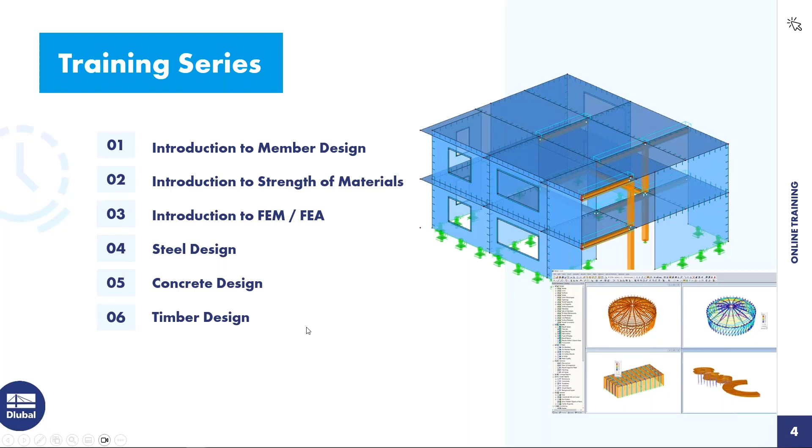Okay, to the whole series of events, you've heard quite a lot until now for the use of RFEM 6. And today is my favorite part of this whole series, the introduction to timber design.

So what are we going to learn today? I have brought 4 different examples. This is just a case of you leaning back and watching, you don't necessarily have to model along. Maybe the first example you could model along, but you don't really have to. All the other 3 examples I use prefabricated templates, so it would be very, very hard for you to follow up if you would like to model along. But that's not a problem, you will get all our examples afterwards in a zip archive.

Good, so that's our today's program. Just to let you know the 4 models we're going to do. We start with an introductory example for a timber column where we're going to perform a stability analysis in timber design. Then I will give you an introduction to design supports and notches in timber design. And then I will model and design a duopitch roof beam for you and a lattice truss. So that's the agenda for today.

It will take about an hour, maybe 5 or 10 minutes longer, but I guess you'll have the time. And then before we start, I have a small question for you. Have you already carried out a timber design using structural analysis software? Just for me to get a bit of a feeling how much experience you have in this topic.

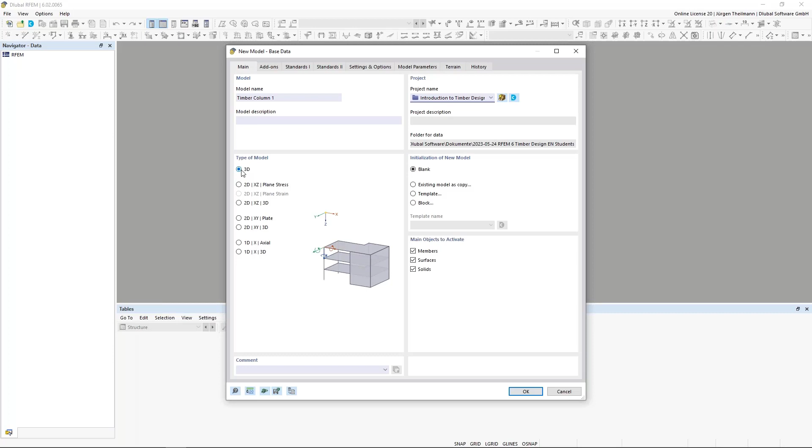I make this a 3D model and jump to the add-ons where I activate the timber design. And after that, it's very important that we go to the standards and check the first one, the standard group for the load case classification. It's not only the EN 1990, it's vital that we choose the 1990/timber here with regards to the SLS. You will see later what this means.

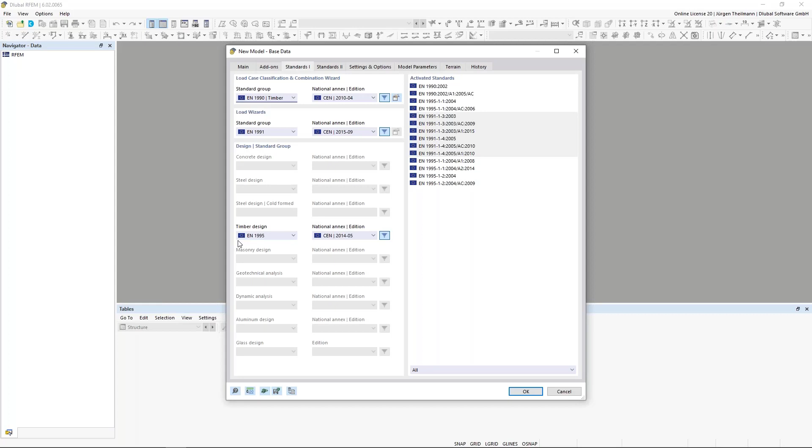We don't use a national annex today because this is an international event, so we're going to use international standards. Also, because the timber design is activated, we can choose the standard for the timber design down here. Okay, that's all I need for this model. I hit OK, and my model will be created in the according project.

Good, I just delete all of these materials and all of these thicknesses. I don't need them for now. So we start with a blank page.

And I just want to design one column. So I say one single member, and I can say perpendicular to the working plane.

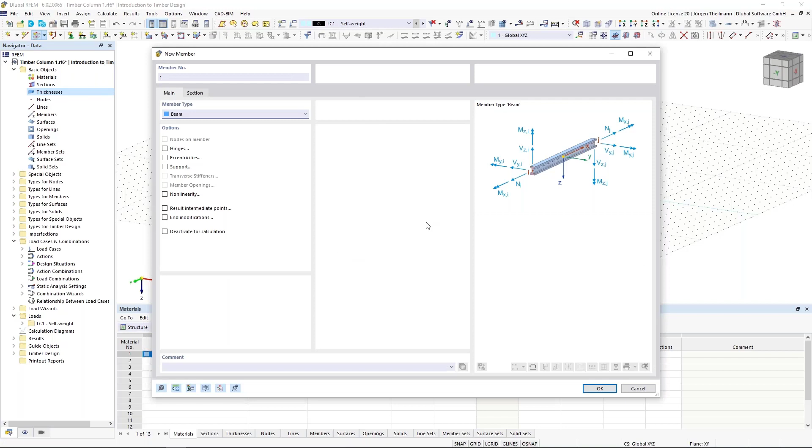So I'm in the dialog for a new member. It will be a beam. I need a section, it will be a uniform distribution type. I'm starting with a new section. I'll make this one parametric massive.

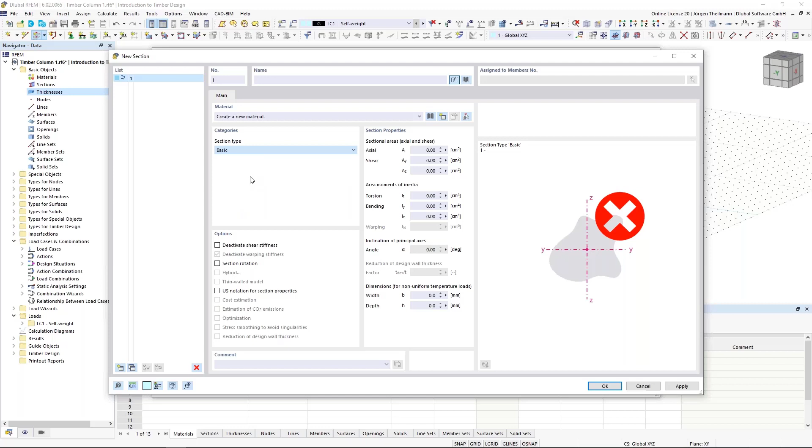Make it a rectangular beam. I added the dimensions, make it 160 millimeters in width and 200 millimeters in height. So these are the dimensions for our cross section.

I jump back to main because I haven't created a new material yet. So I jump to the library for my materials. I'm already in the section European Union and timber.

And now I just utilize our search, looking for C24. Make it this softwood. Good, that's what I wanted.

So now the material is assigned. I can say OK. I have a section with material, say again, OK.

And now you see my mouse cursor has already attached a visualization of this beam I want to create. You can see the dialog on the left. In this, I enter a length of 4 meters.

And you see that at my mouse cursor, if I take this to the origin point of my coordinate system, the column will be pointing downwards. This is something I don't want. I want it pointing upwards.

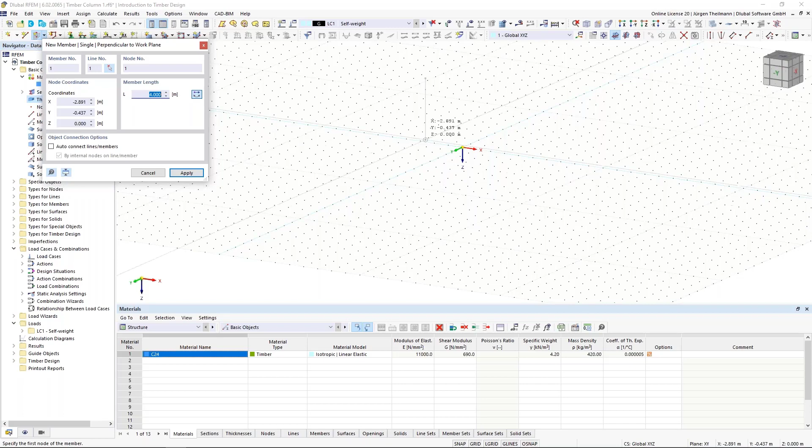So I just use this button in the dialog to reverse the orientation, and I can simply set my column where I want it to be. I dismiss the function with a right click to the mouse. And well, that's basically all for this column.

We of course need now some nodal supports. So I go to nodal supports, use this hinged one to the bottom node, say OK, hit apply to directly create a new one.

Jürgen, we can't hear you anymore, and we also only see a frozen screen. So I hope that Jürgen will be back in a few seconds.

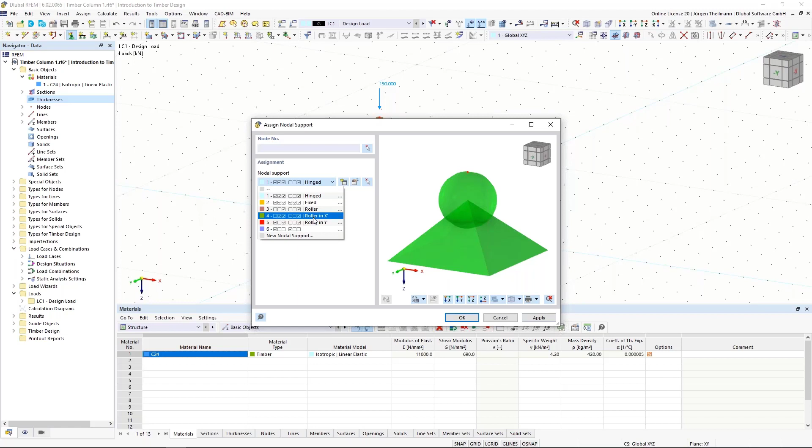It's like this, I guess you all know this. And I hit apply so I can stay within the dialog. There I created a new nodal support just to get a lateral fixation in the x-axis and around the x-axis. I say OK, I can assign this to the top node and say OK again. Whoops, this was wrong.

So now I double click on the nodal support again. These errors can happen very often, but that's not a problem. You just double click on the support itself, and then you can choose from the list. And this is my nodal support number 6, the one I have just shown you.

Okay, I go to the rendering just to check if this is the correct type of my nodal support. Good, now to our load cases.

What I have done here, I have deactivated the self-weight because I want to apply a design load. That's why I called it design load. In the next phase, I deactivated the combination wizard.

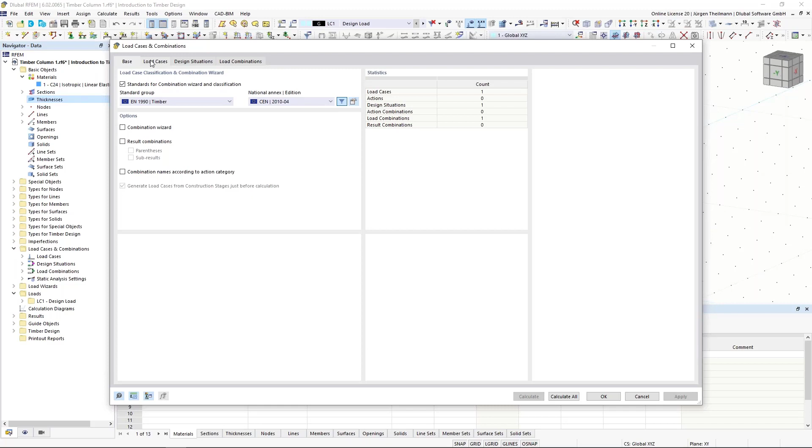This is important - this is the main reason why we choose the standard EN 1990 with timber, because we have to choose our load duration. In our terms, we're going to use a medium term. If we hadn't chosen the correct standard, this whole part wouldn't be available, so we wouldn't have been able to define a load duration. But now we are, since we have chosen the correct standard.

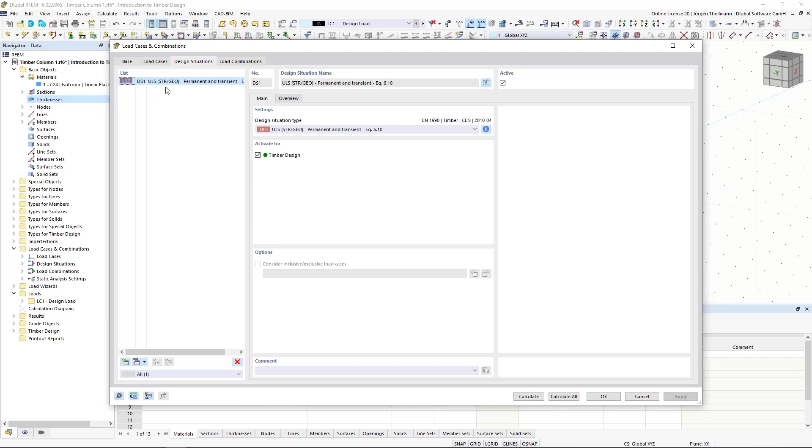Now, design situations - there are by standard some design situations predefined. So we have our ultimate limit state and several serviceability limit states. In this dialog, I just deleted our SLS design situations because I only want to perform a stability analysis, which is of course a ULS design check.

Since I have deactivated the combination wizard, I had to create a new load combination using the button with the star right down here, and I have just assigned our design load times 1. So that's all for the load cases.

And the nodal load is pretty easy. I go to the part where I have all my loads - I have the nodal load. Since I'm now in the load combination, I can choose the load case where I want to apply this load. And within the dialog, I can also jump between.

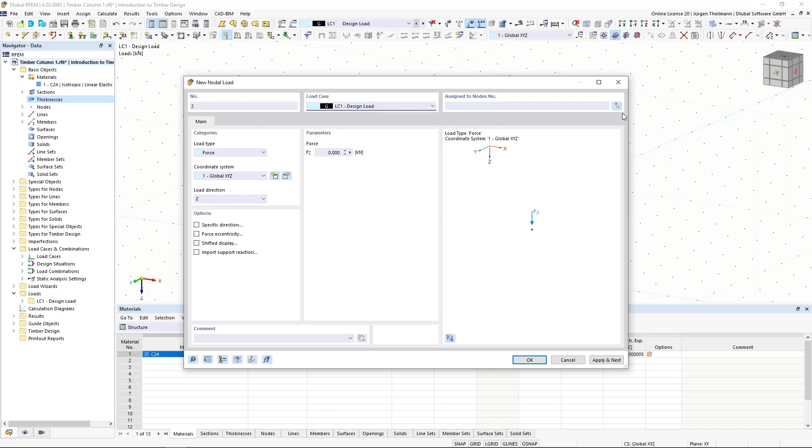It's pretty dull right now because I have only one load case defined, but you can switch if you have several load cases. I assigned the load to our top node, then just entered the magnitude and the load direction. And that's how I got this 150 kilonewtons. So that's for the load.

And now I will jump right back into the member, and you can see that we have the design properties activated. I'm going to jump to the design types. Since we are in Timber Design and it's pretty common to use the equivalent member method in Timber Design,

I have created a new effective length. I'm going to edit this. I have neglected the lateral torsional buckling because I wouldn't expect any lateral torsional buckling in this massive rectangular section here. So I have just deactivated the lateral torsional buckling and jumped straight into the nodal supports for the effective length.

We can switch to the dynamic rendering of our model. Now when I click on a node, you can see a small arrow which shows us this is our node 1. And on the top node, which is node number 2, I will release in Y direction because this is exactly what our global supports do.

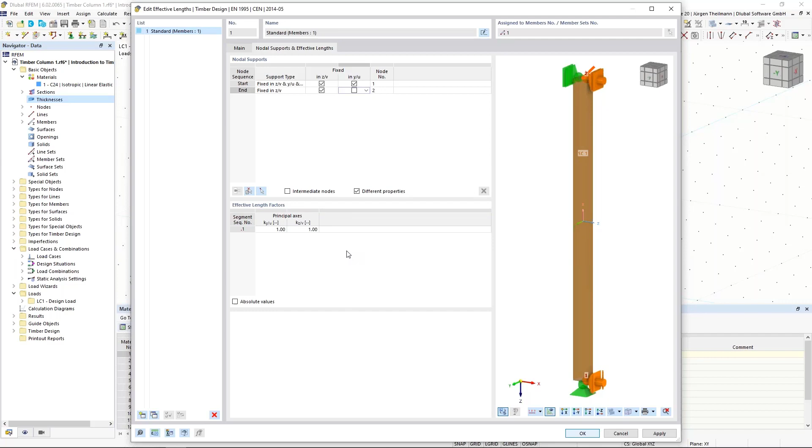Okay, I will leave the factors for the effective lengths at 1.0, and I say OK. Say OK again.

Now, oops, I have forgotten something. Still in the design types, we also have our different service classes. When I edit this, like in many dialogues in RFEM, you will get a small picture which shows you the different service classes, and you can choose between service class 1, 2, and 3. So this column is of service class 1 - this is why I make no changes here.

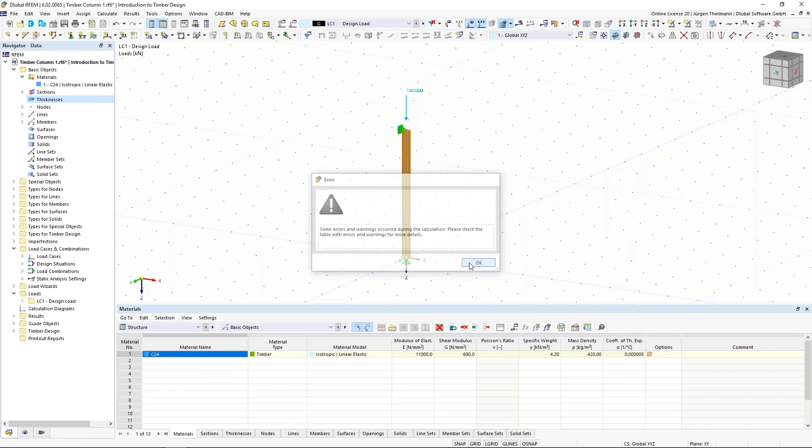Good, I can start my calculation using this symbol, calculate timber design. Now I have an error. Let's see what I have done wrong.

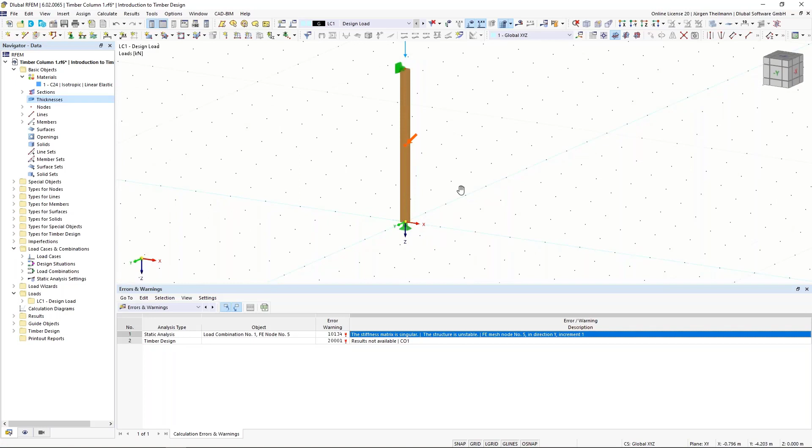Something you might have seen by now - we have 6 degrees of freedom in our system, and I have a fully hinged nodal support at the bottom and no support in Y direction on the top. I haven't seen it so far, so it's good that the program tells me. I edit my bottom nodal support and of course need another fixation around the x-axis. Say OK, OK. So this is a pretty beginner's error I've made here, but you know, everyone can make such mistakes.

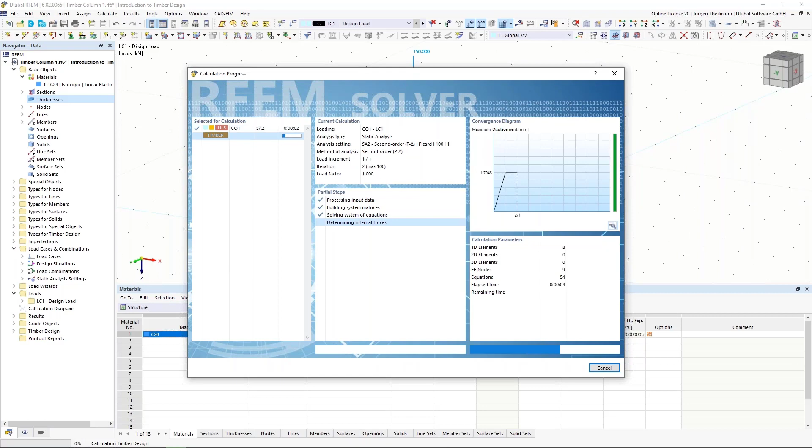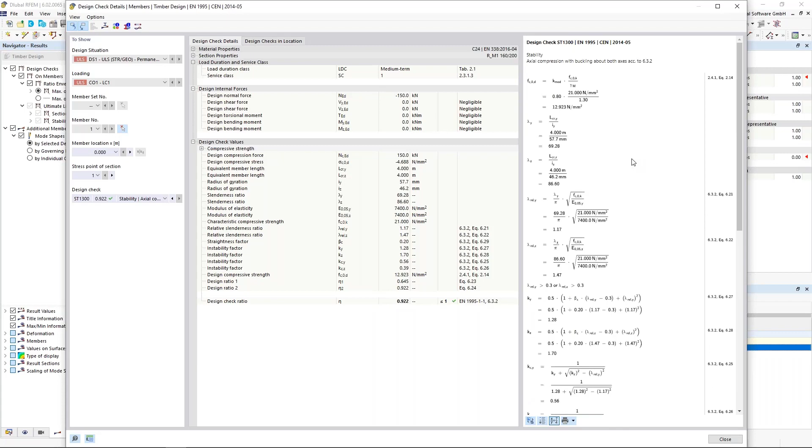So I calculate again. And now you see the design ratios on members - my stability check is fulfilled. I can make a double click on the results, so I can check the detailed results. That's pretty good. So everything's fine, right?

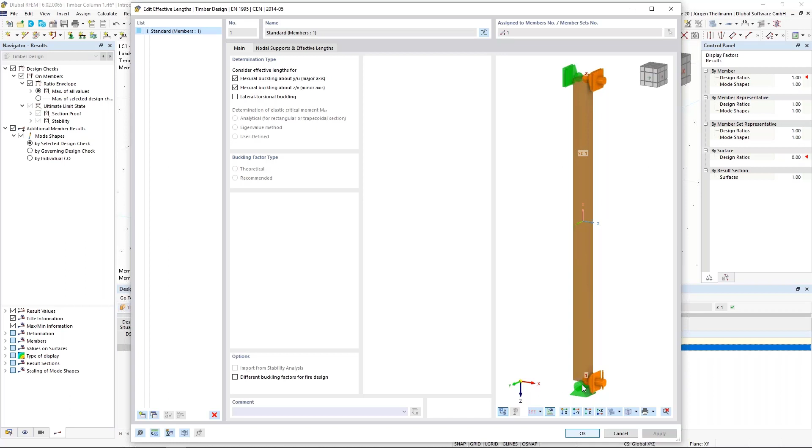Well, not exactly, because when I go to the design types and change the effective lengths, I go back to my dynamic rendering, and you see that in my global Y direction, this column is not right. When I go to this setting, you can see the different Euler cases for buckling, and you can see that our column is like a cantilever. So I have edited our factor for the effective length wrong. I need this to be with a factor of 2.

Okay, calculate again.

And now the design check is not fulfilled for the stability design of this column. I made this to remind you that not every time the program says it's okay, it has to be okay, because there's always something you can enter wrong and the program, well, it doesn't know, it's just a computer. You're the engineers and you will have to consider the correct effective lengths for your members.

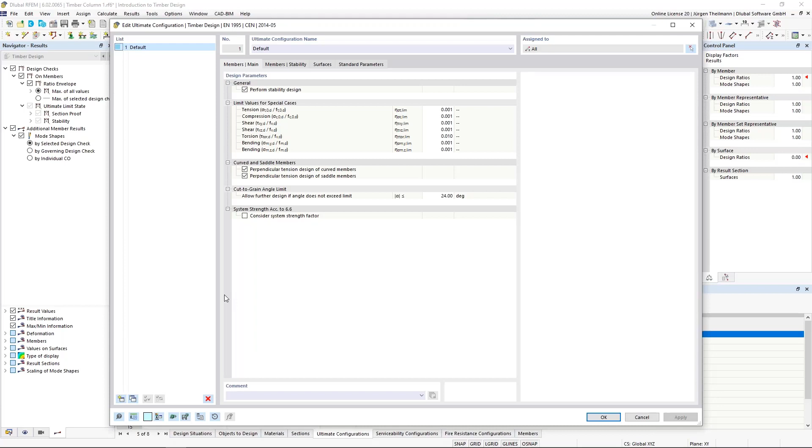Okay, another thing I want to show you in the input data of our timber design. You can go to our ultimate configurations. I open them, and when I go to our member stability, I can activate a stiffness reduction due to creep effects.

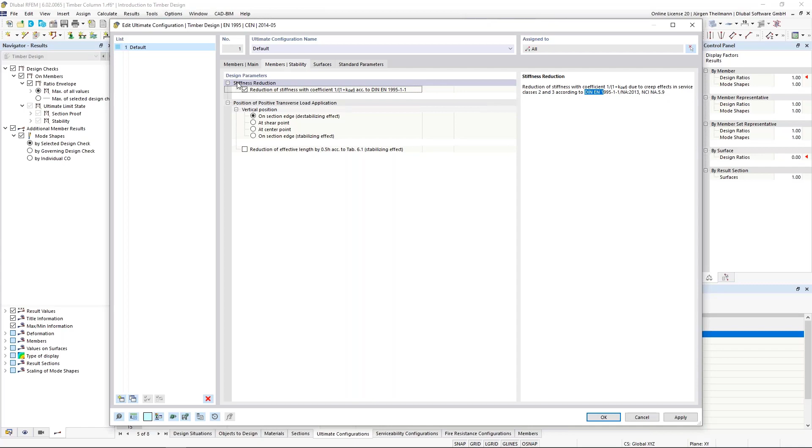Since this is only something we need in our German national annex to the Eurocode 5, you might not need this, but well, maybe if you study in Germany, you will need to know that if you want to consider creeping effects for service classes 2 and 3, here's how to activate this.

Okie dokie, I save this file. And now I'm going to jump right into our next example. Just close this. And this is my example 2, design supports.

Takes a few seconds to open. This is completely predefined. I'm not going to do any modeling in this example, I just show you some details for design.

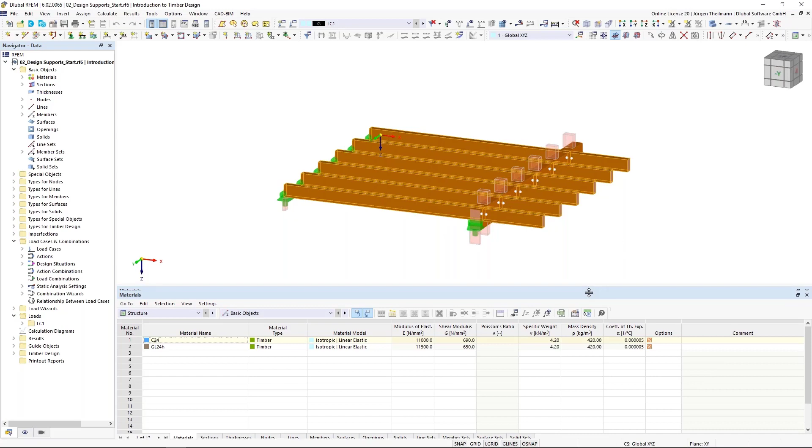So what we have here is kind of a canopy, well, made from timber. And we have one main girder carrying this canopy on the right side. And I have predefined some design supports.

Just to give you an idea why we need these design supports, they have two different main functions. The first is we need design supports as a definition of boundary conditions for the design of compression perpendicular to our grain direction. That's the first thing. And the second one is we need design support so we can perform the segmentation of members and sets of members for the deflection design.

Okay, so I'm going to jump into our first design support. These are rendered with these pink things here. And our design support 1 is now considered with a length of 60 millimeters and the whole width of the member lying on top of it, in our case the girder. So the program calculates the area where the load is applied to.

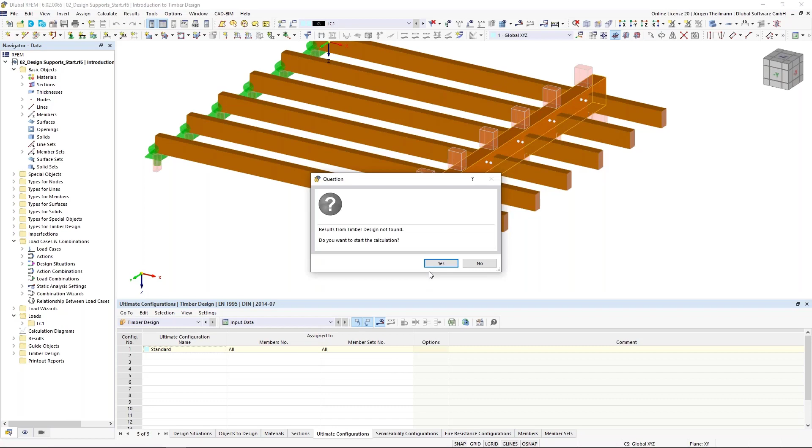And now we have the section proof, compression perpendicular to grain. This has exceeded the design check, so this is not fulfilled. So what am I going to do now? First of all, I double click on the results to get the detailed results. You can see this is our length of 60 millimeters, which goes into the calculation of the effective length of this design support, and therefore the effective area where our load gets distributed to.

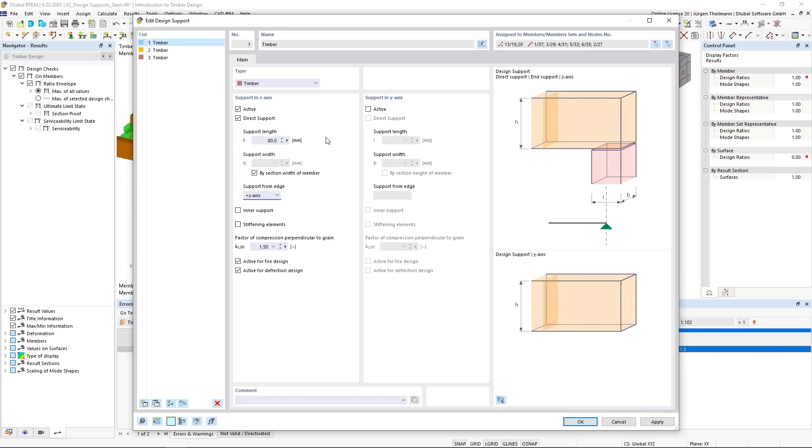So what I'm going to do now is I want to spread the load over a wider area. This is why I'm going to edit the design support and just increase the length of it. Let's say this now has 80 millimeters of support length. That's all the changes I'm going to make. Say OK again, yes I want to delete the results, and calculate once more.

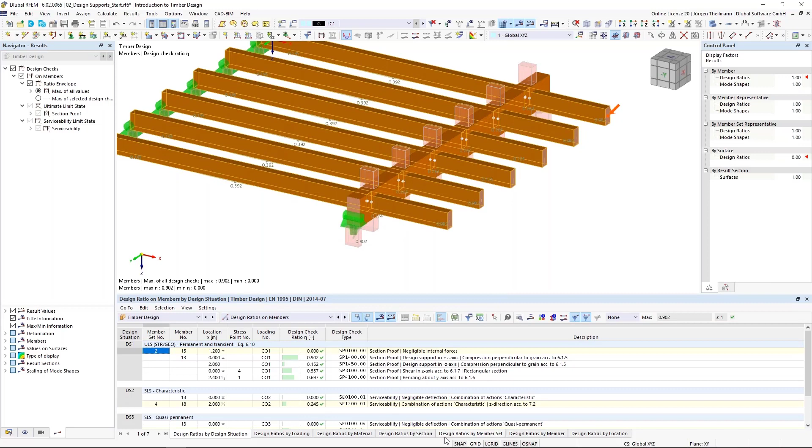Okay, this is now something we don't need for the design supports. And you can see when I go to the member set, because the girder is a member set, I can see the design support compression perpendicular to grain is now fulfilled. I open the details again, and you can now see the changed length of 80 millimeters, and everything is fine right now.

This is, I see the wrong set of members. Let's go to, where's the other one? Okay, so the girder is not a set of member, this is a single member, but you can also see that the design check is now fulfilled.

Good, so what I want to do now with this model is I'm going to create some notches or openings. I will do some notches, openings are done in the same manner. So I'm going to our first member and edit it again. And you can see the design properties in this member are via the parent set of members.

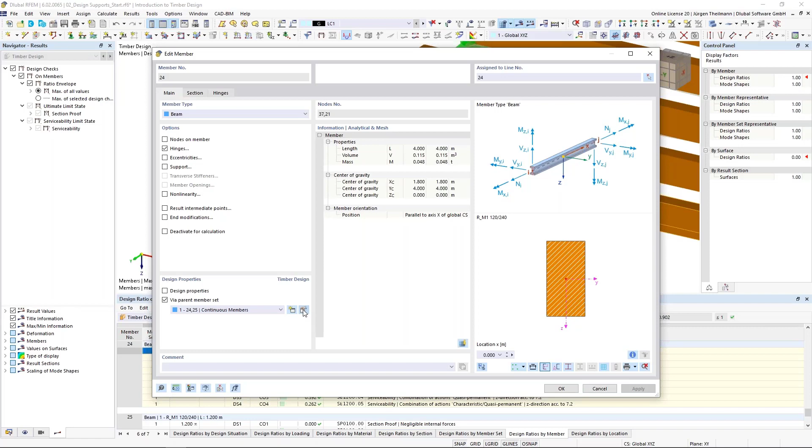So I can do no design properties in the member, but I can directly switch to the set of members and edit the design types. And I'm going to need my local section reductions. Create a new one.

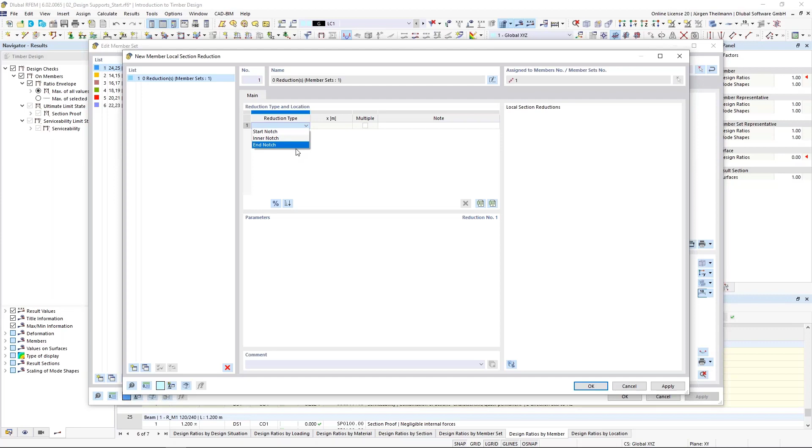And we have different types of reduction. So we can have a start notch, an inner notch, or an end notch. Since I want to do this notch at the beginning of the member, it's a start notch.

I'm going to add the dimensions. You can also look at the bitmap on the right to see what length we need. It's measure number A, so this is going to be 4 centimeters, which in meters will be 0.04.

I'm going to orient this to the depth of the beam with a reduction height of 100 millimeters, and notched from edge the plus axis. In our example, that's the downside of the beam. It can also be the upside if you want to, but in our case, it's the downside.

Also, this notch is at a support, so I just activate that it's a notch at support. Okay, yes, I delete my results, hit OK in every dialog, and calculate this thing once again.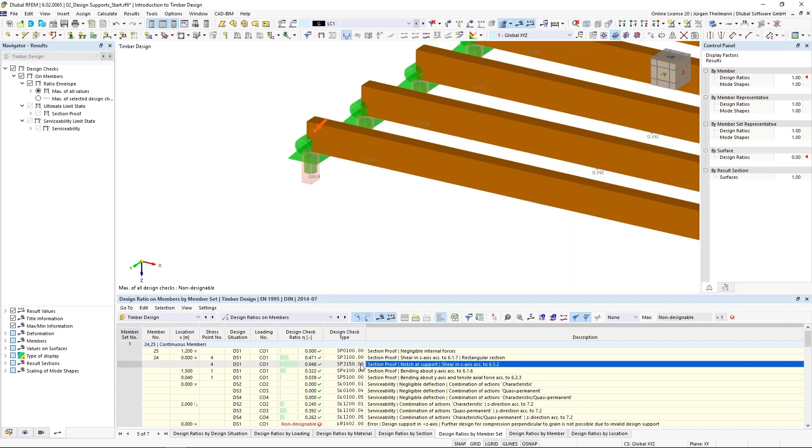I go to my design ratios on members again. Go to the member sets, and you can see the notch at support here, section proof notch at support, and you can see the details of this design check.

One thing I want to address is we have a small error, non-designable, because I have added this notch at the support. We are now not able to perform the compression perpendicular to grain in this point, but this is something our development is already working on. It shouldn't bother us now. Later on, I'm sure this function will be ready.

Good, I will save this. Did it work? Okay, I say yes, save it.

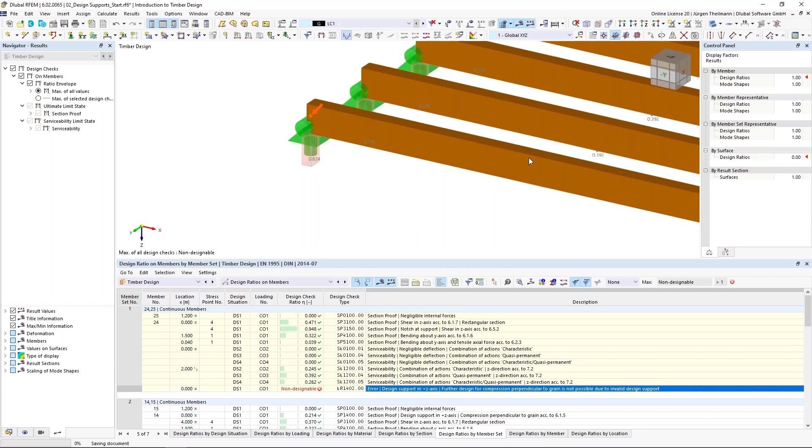And while the program closes the file, I have a second question for you. So get ready, the question is very difficult.

For the verification of pressure perpendicular to grain direction, design supports must be defined. So is this true or false? There's only one correct answer to this question.

Good, okay, I'll give you a few seconds while my program opens the next template for the next model. Okay, it's open, I will close the question and show you the results.

Wow, 100% correct answers, that's cool, I like that. Good, so before I start with the next example, once again, I want to apologize for the freeze before. And Rebecca, do you have any open questions for me I need to address? No, there are no unanswered questions. You can continue. Awesome, okay, that's good, thank you very much.

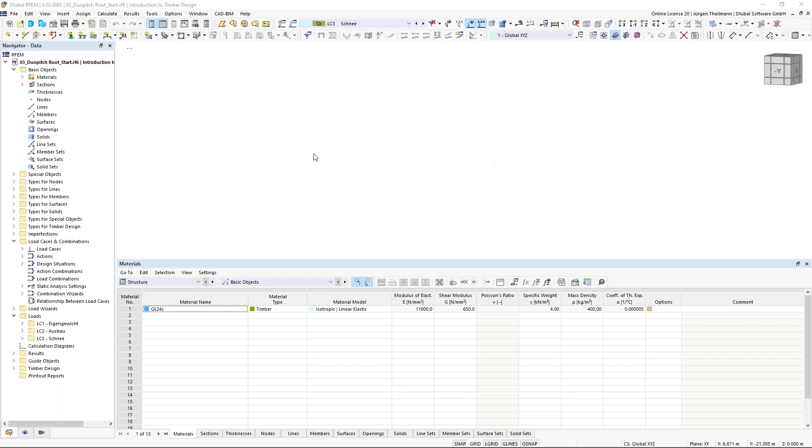Okay, as you have seen, I have a kind of empty template right here. I activate my grid. And you can see that I have a material defined, I have two different cross sections defined, and I also have several load cases. Good, this is just to save us some time.

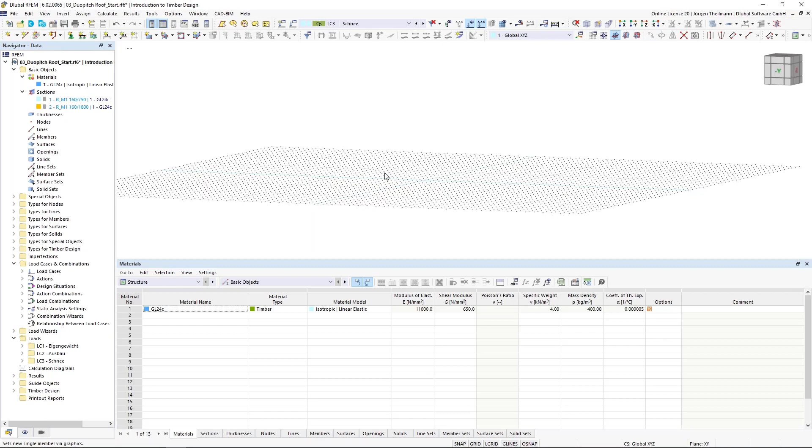I'm going to start with a new member. So this is just a simple member, it's going to be a beam with a section, with not a uniform type of section distribution. You might have seen this before. We can do some tapered beams, tapered at the start or in the beginning of the beam, and we're going to need a saddle distribution.

So we can do this like shown on the right with such a fish belly shape, but we need the alignment on the bottom to have a distribution like this Duopitch roof. Okay, so alignment at the bottom.

You can also adjust the location of our saddle point. I will make this at the middle, at 50% of the length. You can also set an absolute number for this middle point.

And I'm going to assign our cross sections right now. So you just go to the picture on the right, just to be sure. We have I, J, and K. So at the start, at point I, we need the first cross section. I choose my predefined cross section number 1.

At the end, it will be the same as at the beginning, so I say as member start. And at the internal point, we need our second cross section, I just assign this. And the material is also assigned already.

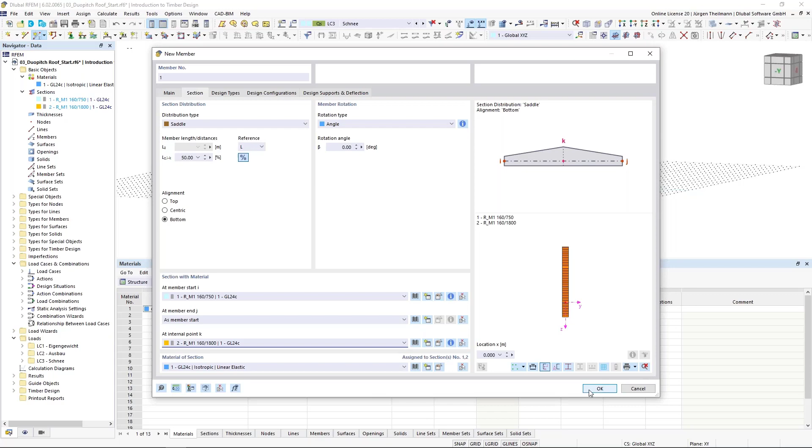Okay good, and now I'm going to start at the origin point of our coordinate system and make this beam 24 meters long. Yes, it's 24 meters long.

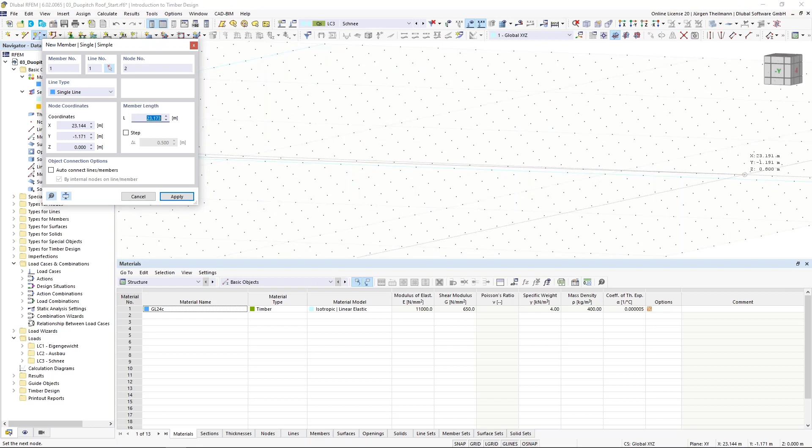Where was it? There it was. 23, 24.

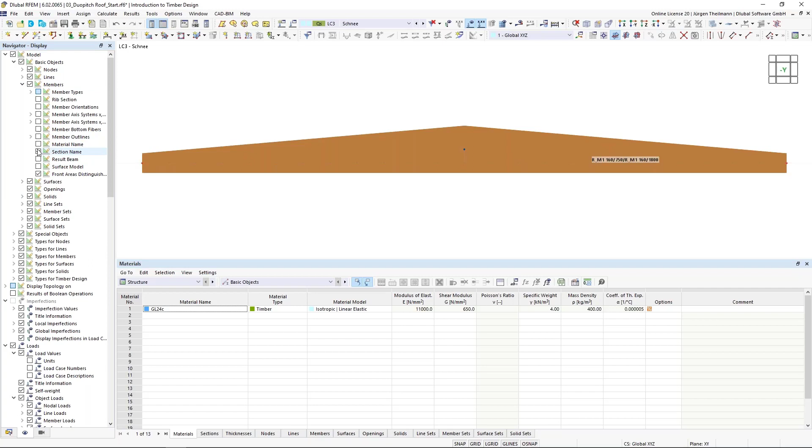So this is our duopitch roof. You can also see I have the name of our cross sections visible. I go to the display navigator, to members, and then you can show or hide different additional information to your beam if you want to have them.

I just deactivate this. And what I'm going to do now is divide this beam because I want some internal nodes for a lateral fixation.

So how do I get these internal nodes? I just right click on the beam. I say member, divide member with n intermediate nodes, and I'm going to divide it with 5 nodes. I don't really want to divide this member, I just want to set internal nodes on it. So I say create on-member nodes without dividing the member, and say okay. I just have these blue nodes instead of the red ones, which come by standard, and this is still one member, but I now have my 5 internal nodes on this member.

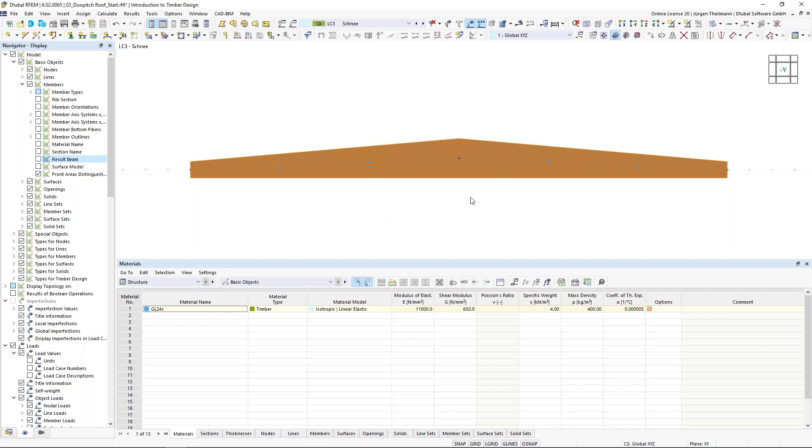Okay, so I will edit the member for my design properties. I go to the design types again. Like before, I will add some effective lengths. Now for this cross section, it would be good to consider the lateral torsional buckling.

We have 3 different methods of determination of the elastic critical moment. I will use the analytical one here in this example, and go to the nodal supports to get our lateral supports on the intermediate nodes.

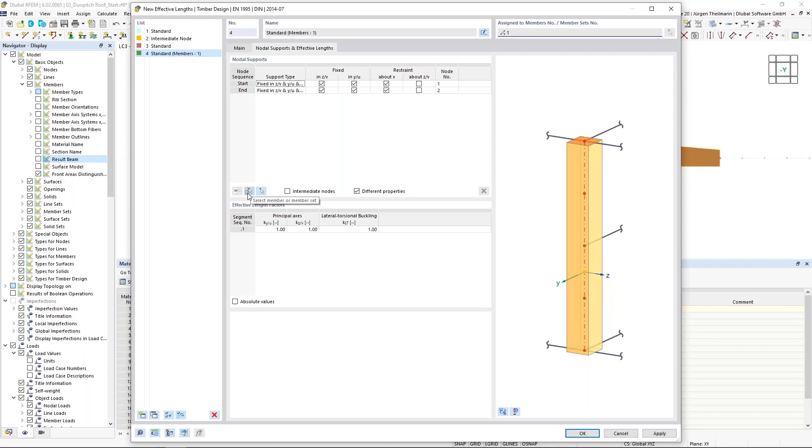I will use the button, select member, and select the one member I have, and automatically I get all our internal nodes displayed in this dialog. I just add a lateral support for all of these, and you can see our different effective lengths around the y-axis. We only have one length, like in the dynamic model, it's from node 1 to 2, and around the z-axis we have all our different lateral supports considered for calculating the effective length.

It's also possible for our supports to consider an eccentricity, like upper flange, lower flange, if you want to, but I will not use this in this model, just to show you that it's possible. Okay, this is the effective length now for this. We have our service class 2. Okay, let's use this.

And now I need some load on this thing. I go to my load cases. At first I check the German Eigengewicht, which is self weight, of course, in English, that the self weight is deactivated. I hit on apply, and I go to my, just call it imposed loads, and snow. Good, say okay.

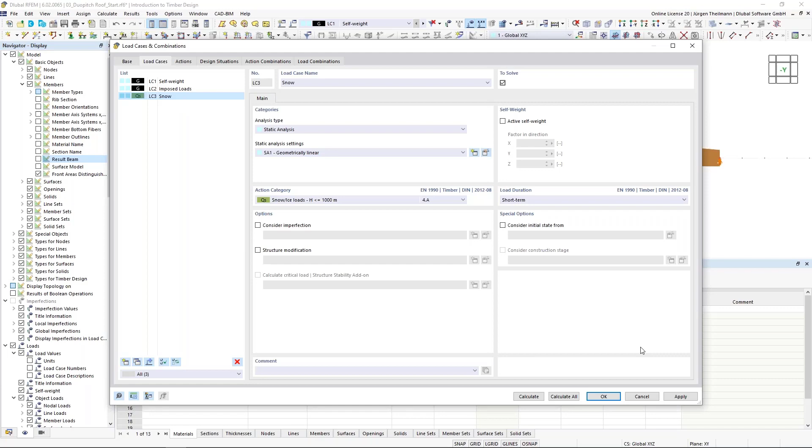And then I add the loads for self weight. Because I have deactivated the self weight, I want to add it manually. Since we have a member, I'm going to use the member load. It's pretty much the same as in our nodal load. I have a load case, I assign the load to an object, so I go to member number 1. I enter the magnitude, 1.02 kilonewtons per meter. Make this force uniform in the global z direction on the true length. I hit apply and next.

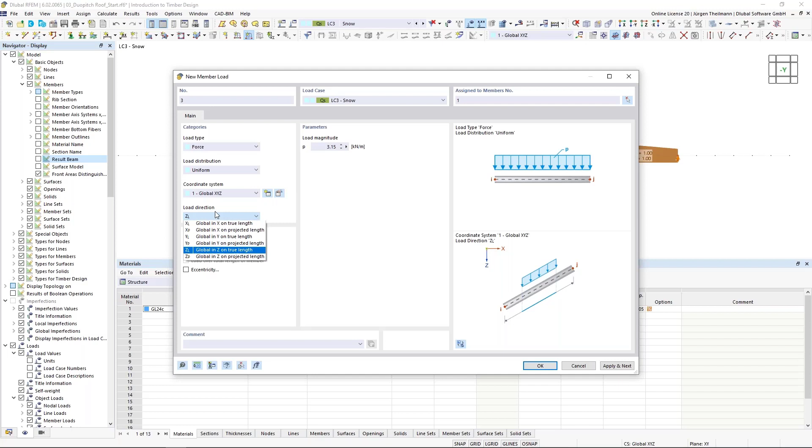So this load is now applied in our load case 1. I'm still in the dialog, switching to load case 2, assigning a new load to member number 1. 2.7 kilonewtons per meter, again a uniform force in the global z direction. Apply and next, and at last the snow load, again to member number 1, now with a different magnitude, 3.15 kilonewtons per meter. And here's the thing, we have global z on projected length for the snow load. I hit OK, so you see the loads for the snow and for our other load cases.

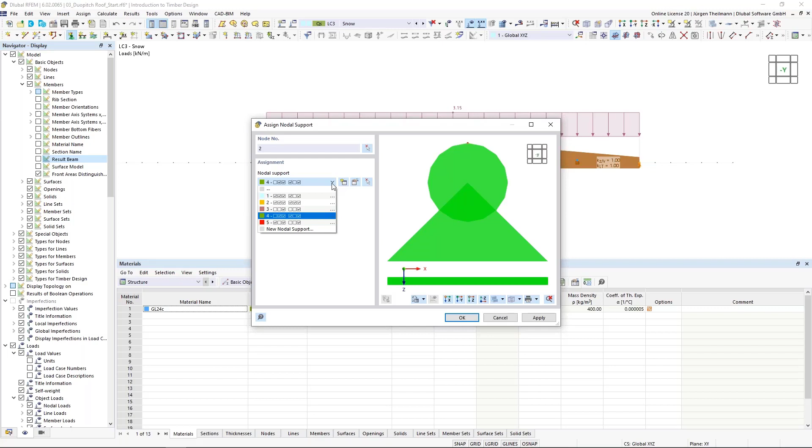Good, so since I want to calculate this thing now, you might know that we still need some supports, because elsewhere it would fly around. So I just add nodal supports again. This time I use the roller, this one, roller in X direction, to the right node. And the hinged one - sorry, I first have to apply it - and I use the hinged one on the left. Hit OK.

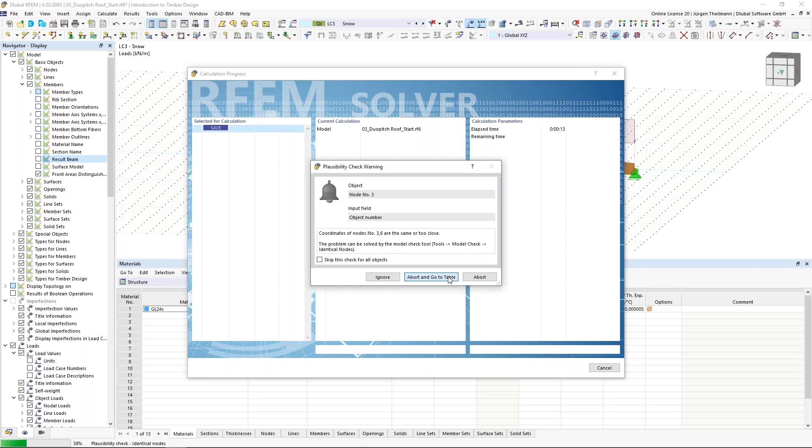And this looks pretty good, so I just say I will calculate all. So now I have a small mistake. You can see that coordinates of node number 3 and 6 are too close. I go to the table and you can see I have two identical nodes. What happened here? The middle node - we have created an intermediate node by the division of our cross section, so our middle node at point K is defined with an internal node. And also, since I have divided the member by 5 internal nodes, there's also another internal node at the same position. So the easy fix for this would be to just delete one of these doubled nodes, and everything should be fine.

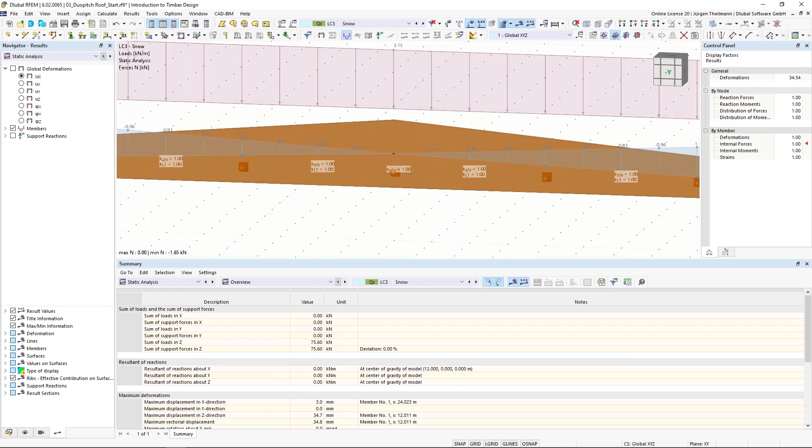Good, so I'm looking at these results. You can see in the result navigator that the normal forces of this member are active, and you can also see that we get compression.

So you might wonder why we have compression, because we only have bending on this beam, but this is something hand calculation does not consider. The hand calculation completely neglects the statical line eccentric to the geometric line. So this normal force is something that only comes in reality and not in your hand calculation, but it's here, it's active, and it has to be considered in design. So this is absolutely correct with this normal force for this section distribution.

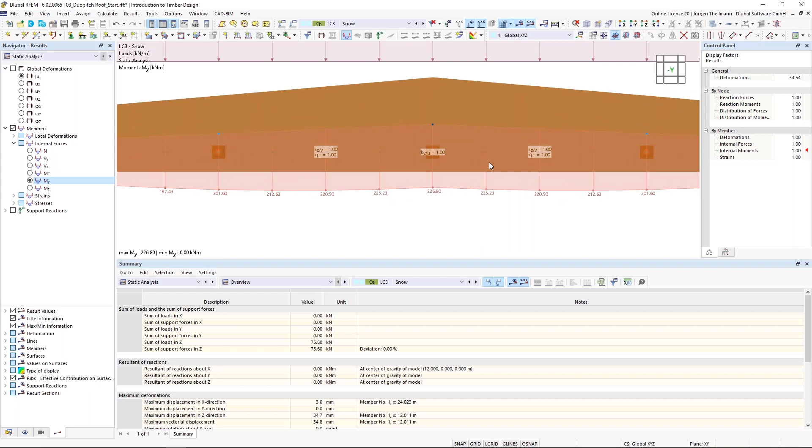Also, the moment distribution in this case is due to our eccentricity of the static line. You can see that this is not a perfect parabolic graph here. And the location of the maximum bending stress is not in the middle of the beam, what you would have expected if we had a constant cross-section distribution here.

This now leads me to one thing that you might already know, but you really have to consider this when you're calculating and designing a structure like this, is that we also have - I go to calculate and the mesh settings - we also have an FE mesh on members. So this is represented by the number of divisions for the members. And now we have 24 divisions. I just set this to a very small number, to a ridiculously small number.

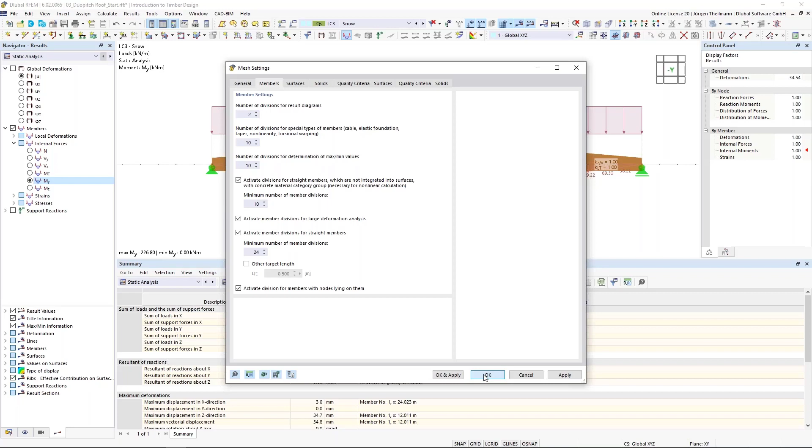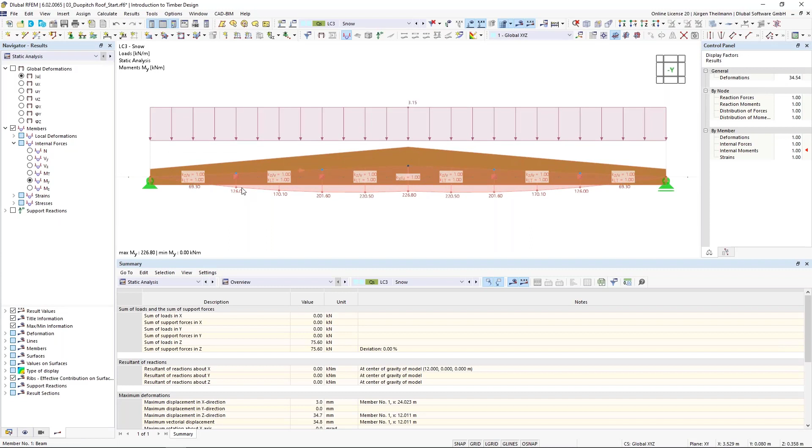I say OK and calculate again. And now you see this diagram for the bending. This is not usable anymore. So the ones of you who have already heard our training in the introduction to FEA know what comes next: it's the basic rule to set every FE mesh, even on members, to be as coarse as possible, but still as fine as necessary. And this is a case where we need a finer mesh just to determine our place of the maximum bending stress in this member.

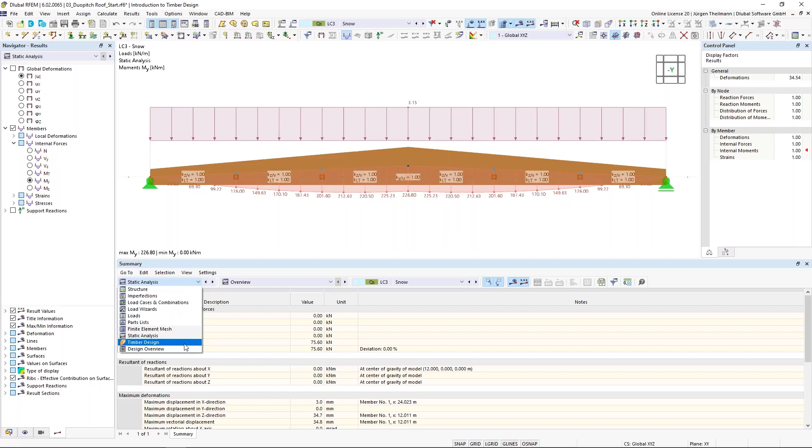Good. So to our timber design, we now have our section proof and stability proof for this member. I go to the section proof, and here's something I want to show you: it's the cut to grain angle. You might need this for your studies, for some exams you need to perform. You can get that angle here.

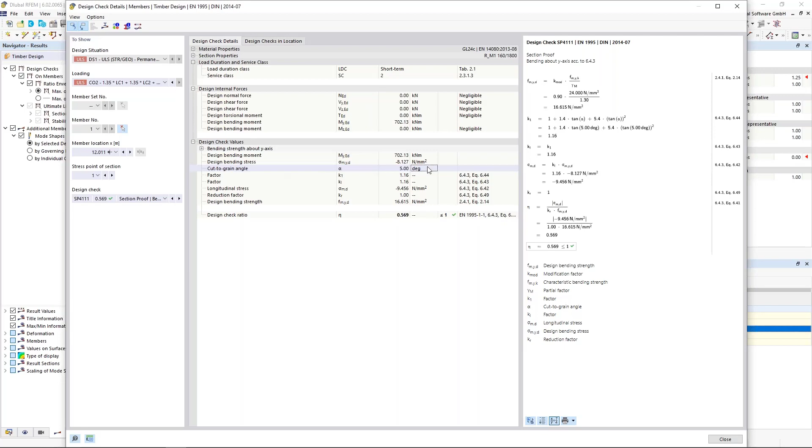Good, and that's all for this model. Again, I will save it and jump to our third question I'm going to ask you. This again is something you should know, should have heard by now a lot of times: to determine the location of the maximum bending stress, a not too coarse member subdivision should be chosen. So this is about the FE mesh refinement on your members.

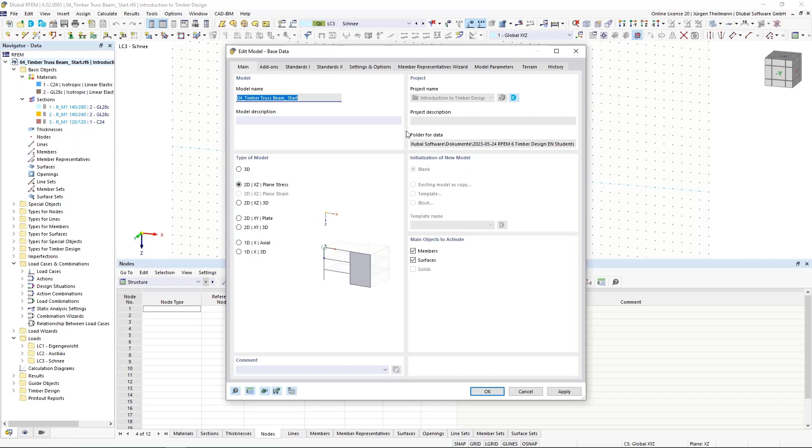Okay, there's one main thing I want to show you in this example, and this is why I go back to the model base data here and to the settings and options, because we have in this model activated member representatives. Good, just to get you an idea of what member representatives are, they help you modeling and designing in a very quick manner because they are kind of templates.

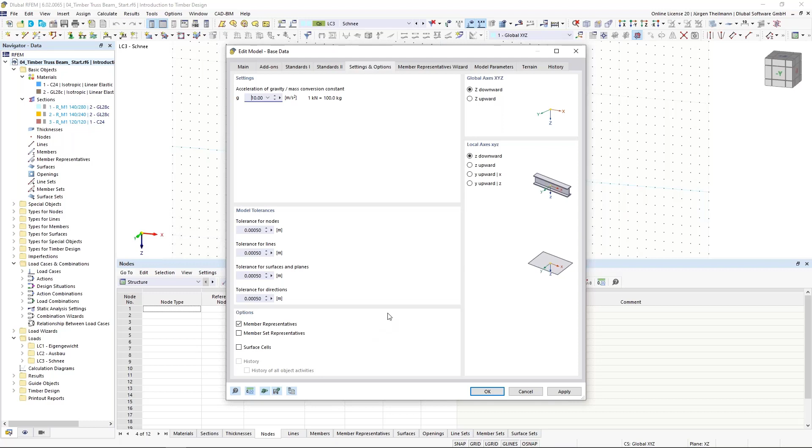So you use all members with the same material, section, line type, member type, and length, and you can also define different other member properties for this template you want to use on a certain member representative, and they will help make it very easy to select multiple members at a time, even in a rather complex model.

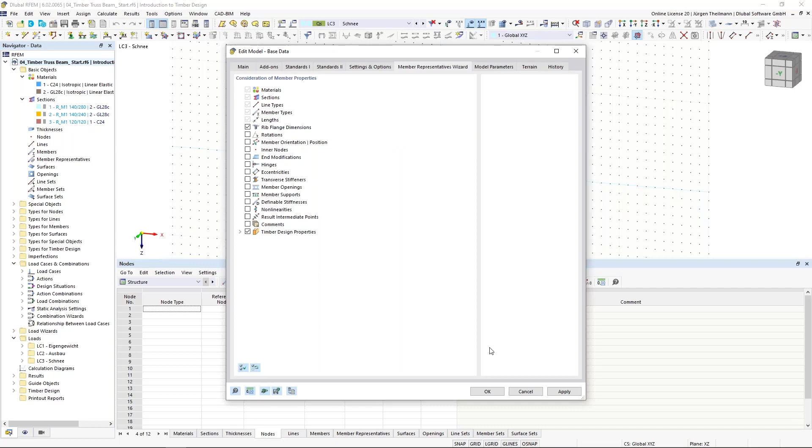Okay, so I'm going to start right ahead with my member number 1. It will be the upper girder of our truss. So I will just make a simple member again. This would be a beam, a uniform distribution with our section number 1, with material number 2. And I say okay, and this will again be 24 meters. Oops.

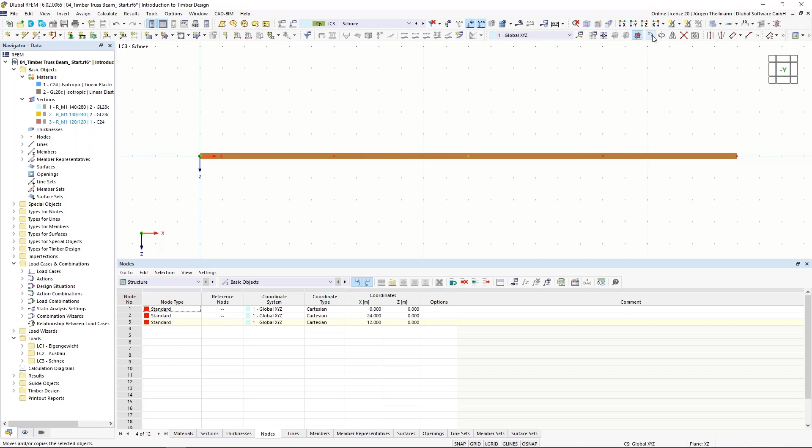For our upper girder, this is now a straight member. I want to divide it with one intermediate node, and this time really divide it to have two members afterwards. This middle node is going to be moved up - not a copy, really moving it - in the global Z direction by 1.8 meters.

So it's up here. You may already see that we not only have our red nodes, which have a round shape, we also have these small red squares. They are the visualization of our member representatives. So we have member representative 1. I click on it and both our members of the upper girder are selected now.

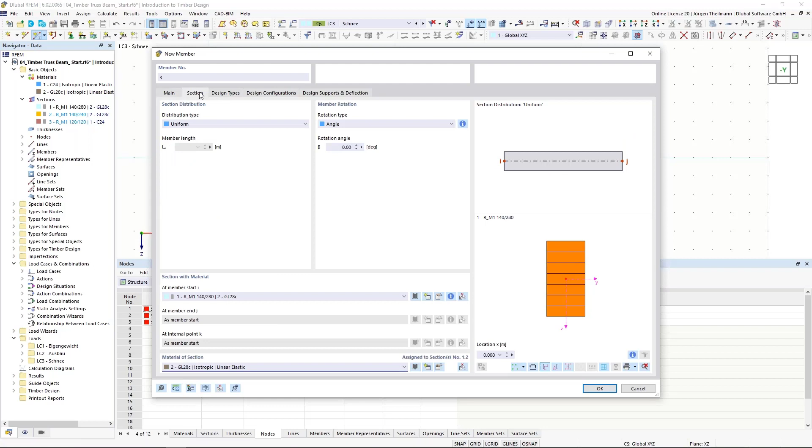Next I want to create the lower girder. So I go to new member once again, a beam. This time it will be section number 2, again material number 2. I say okay, and this is just to close this thing.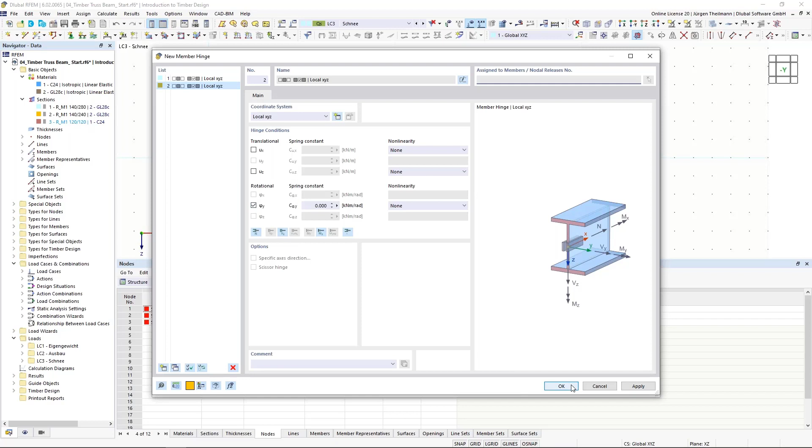So I want to use kind of a 3-hinge truss in this model. I need a hinge on the top node of the whole truss, so I just take the left part of the upper girder. I activate my hinges, go to the tab hinges, and at the end of the member I create a new one. Well, it was already predefined, so I create it once again. It's okay, I just need a member hinge, a moment hinge.

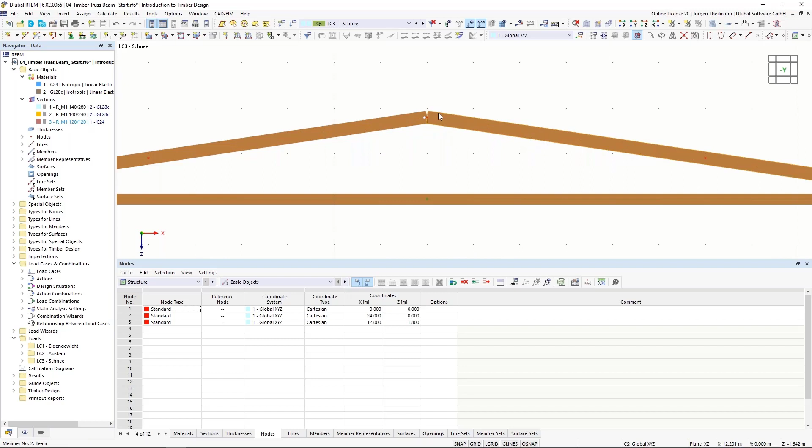So we have our hinge on the left. You could ask why didn't I also make a hinge on the right part of the upper girder, but that would make a so-called hinge chain, and this middle node would become unstable. So I have already considered this and only made a hinge on the left side of the upper girder.

Good, now I will divide all 3 of my members again. So I have 3 members selected. I divide them with 2 internal nodes. And this time again, it will be divided by these nodes of the type on member - I always say this wrong.

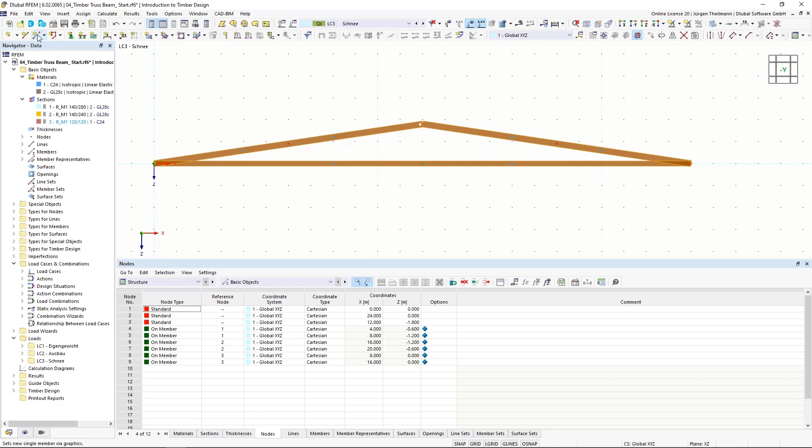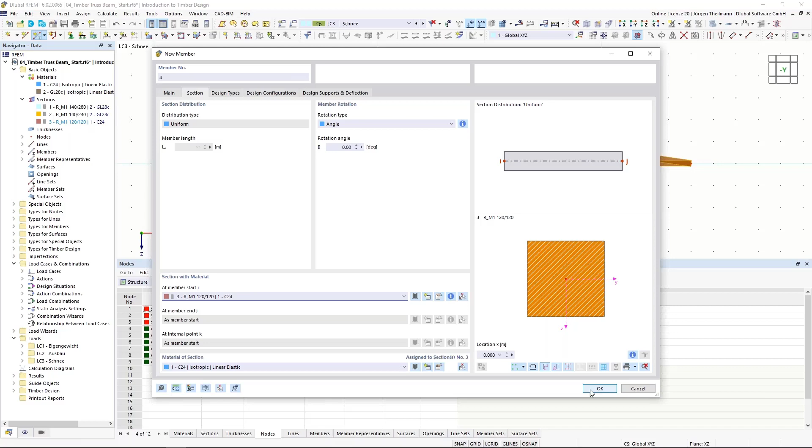Good, I go to section. This one will be section number 3 with material number 1, a squared section. Say okay, and just quickly assign it to all the truss members. Right click to dismiss this.

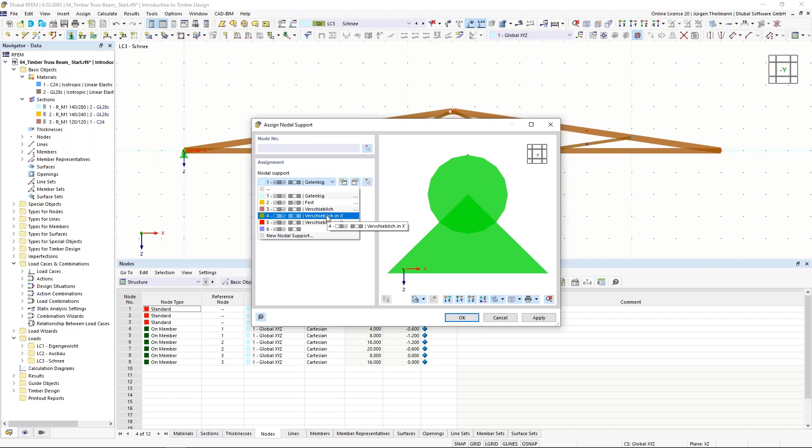Good, so this looks pretty good. We still need some nodal supports, so it's the same as we have done several times today. This, in German, should be hinged here - so you can learn a bit of German again. To the left, gelenkig means hinged, and verschieblich in X means a roller in X direction. And put this to the right. Now we have our supports.

Good, now I want to go through my prefabricated load cases once again. This time we will consider the self-weight of this structure. In load case number 2, I will again assign some member loads, this time on the upper girder - member 1 and 2, with a magnitude of 3 kilonewtons per meter, global Z direction, on true length.

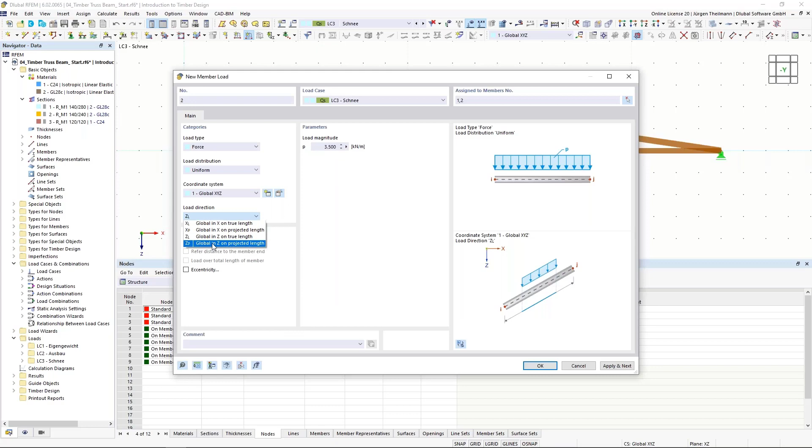And load case number 3, new member load - this time 3.5 kilonewtons per meter, global Z direction, on projected length. I say OK, and then we control: snow load on projected length, other load on true length.

Good, I just switch to my load cases again and to the design situation. You can see that in the design situation is where you actually choose your combination wizard, to see after which calculation theory the load combinations are built. So this combination wizard is set to geometrically linear. It can also be set to p-delta if you want, but in our example we're gonna use the geometrical linear method.

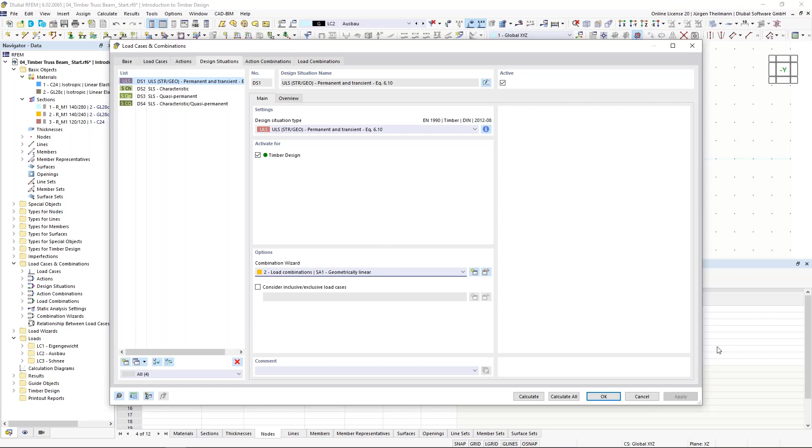Okay, that's for the load. Next I want to edit our design properties, and now our member representatives come into place. When I go to member representative number 1, my members of the upper girder are selected. I just double click on one of these members - they are all selected now. So now all my members of the upper girder are selected and can be edited simultaneously.

I go to the design types. I will add an effective length, or choose one I have already predefined. Let me go to edit to show you what is done here. This is the analytical method for lateral torsional buckling, nodal supports, and we have our effective lengths.

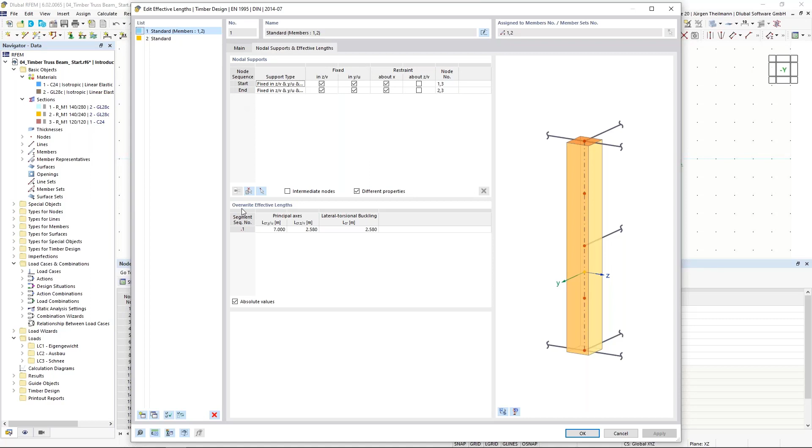In the previous example, we had our effective lengths calculated by the nodal supports, but you can also override them manually, in this case with absolute values. When I uncheck the box, it's with a factor. When I check it again, it's with an absolute value, in this case 7 meters, or in Z direction, 2.58 meters.

Okay, I go to the lower girder. I could use the member representative once again, but there's no fun in this because now we only have one beam with this representative. Go to the design types and add effective length number 2, also predefined. I'll show you what I have done here. So this is with no lateral torsional buckling and just a factor of 1 for the effective length.

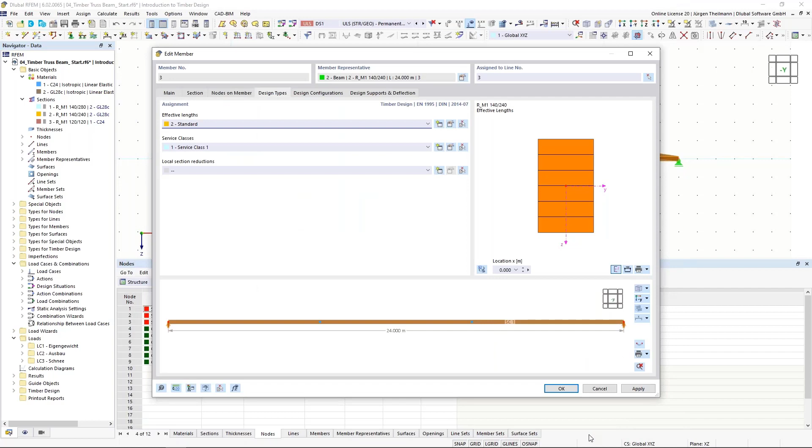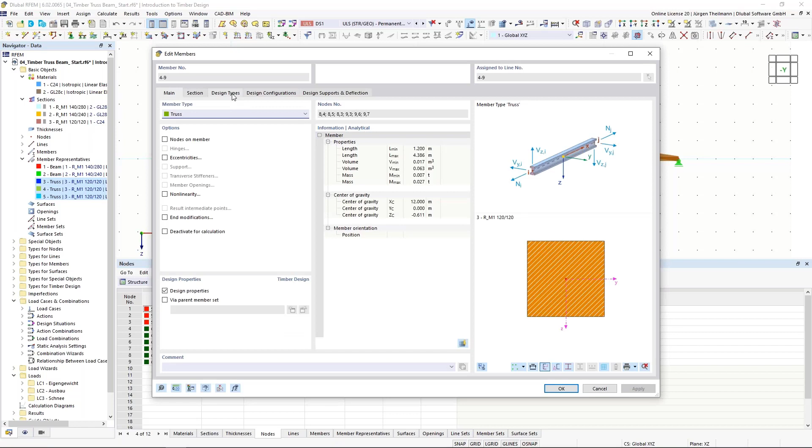Good. Okay, and for all the others, I can go to my data navigator, and I can also pick all member representatives directly from the navigator. So if you know these are the truss members, you can select them all and edit them all simultaneously, all at once. Go to the design types, effective length number 2, same as the lower girder, and say OK.

Now when I calculate all, we can see our results on this lattice truss. So we're now in the global deformations. I just jumped to the timber design. There are now many section proofs not fulfilled, but in the end this will be your job as upcoming civil engineers to see what went wrong here and what measures have to be taken to get this done properly.